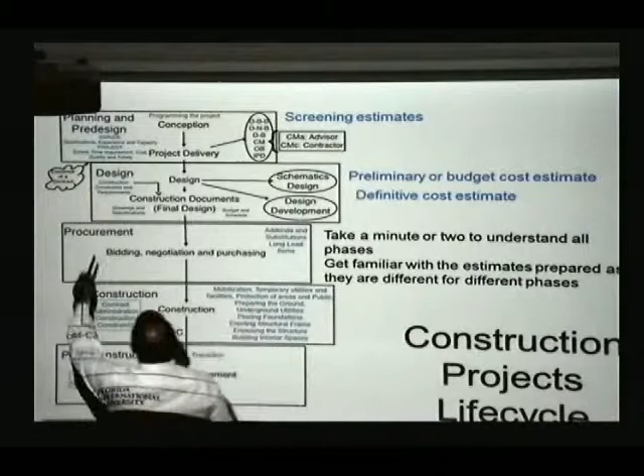All right, so this is the life cycle for a construction project. We start with the planning and pre-design of the building, or the concept that the owner wants to get done. It starts with the conceptual phase, right? What the owner wants to do. Is that a school? Is that a platform to launch rockets? Whatever it is. And then based on the experience of the owner, their capacity, the size of the project, they will decide what type of delivery system they prefer.

So then they will go with design build, or whatever contract they want to proceed with. And then they go into the design phase, saying, okay, let's design this a little bit, let's put the concept more into paper, and then it becomes a level where you have more documentation. At the beginning, you only have that conceptual idea, so it's difficult to put a number on a concept.

That's why at the beginning we create what's called a screening estimate. These are estimates based on price per square foot of other projects that have been done before, so you get an idea about how much you are going to spend without knowing exactly how much it's going to cost. As you move down to the design, you may start with preliminary design, you may have some schematics, so you create a more accurate estimate.

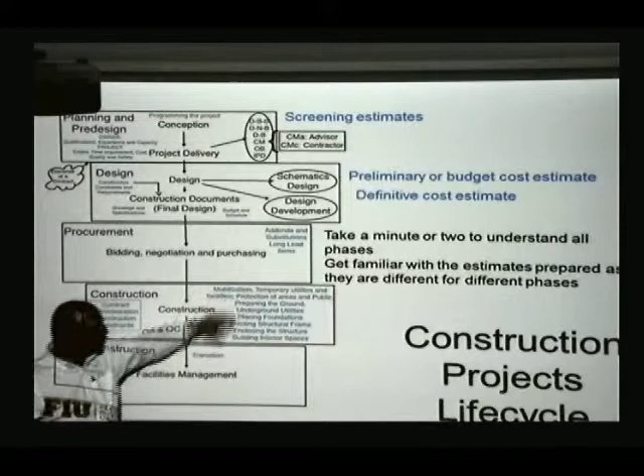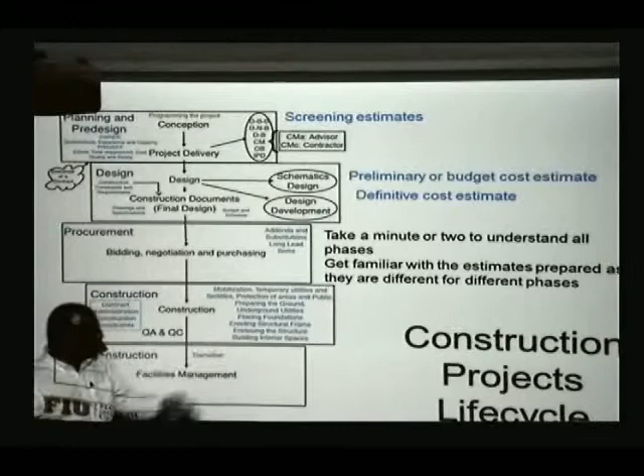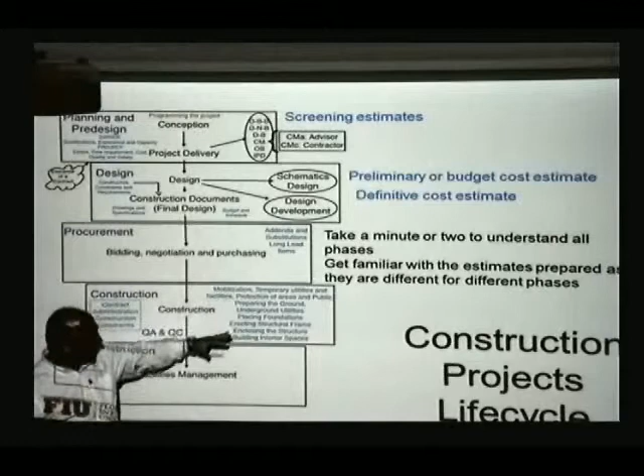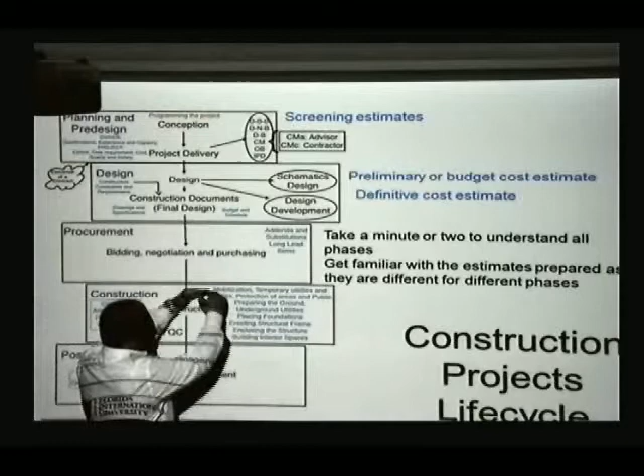Then you have to prepare the ground, look for underground utilities, place foundations, do the steel frame, close the structure, build interior spaces. That's the big items you need to go through to build something. And what we have to do is estimate the cost with each one of these items to figure out how much the total cost is going to be. So that's our first breakdown, right? We take a construction project and break it down into phases: mobilization, temporary utilities, the ground, underground utilities, foundation, the structure, enclosing the building, and then interior spaces. That's kind of in big pictures how we start breaking down that large project into pieces that are easier to

handle. Then we have the post-construction. The owner takes occupancy of the building, then the building now goes to facilities management. There is a transition and a closeout, then the owner takes over and moves forward. So that's for us the construction life cycle. Here on it will be operation, and then later will be decommissioning. We're not going to get into that portion of the life cycle for the project. So this is where we're interested to do our cost.

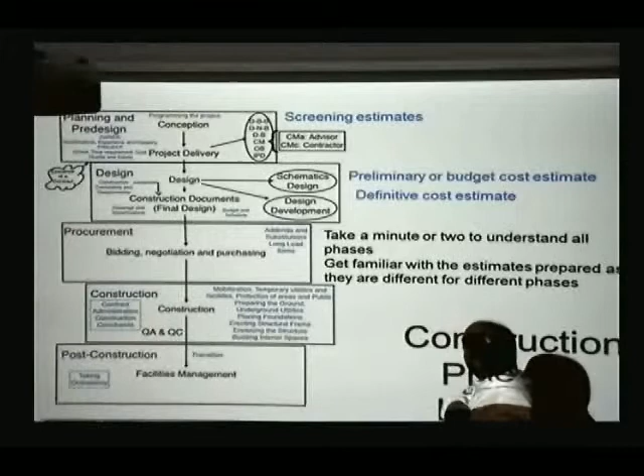The tricky part is that from the conception point, we're asked to prepare an estimate. How do you prepare an estimate when you don't have enough information? Just using the one that you did before. Use square feet cost, use what you did before, your best guess, and then move forward as you get more information to do a more accurate estimate.

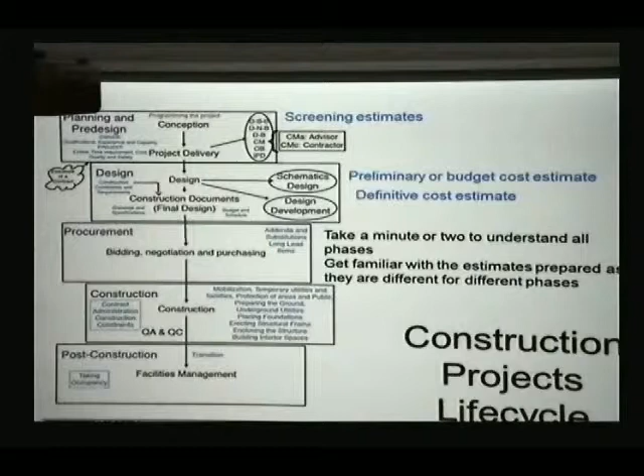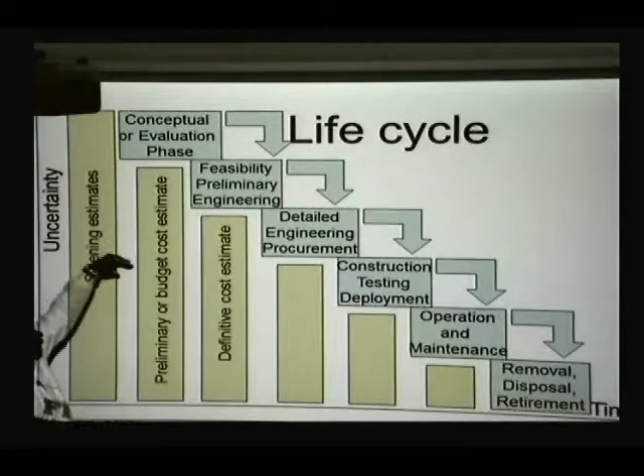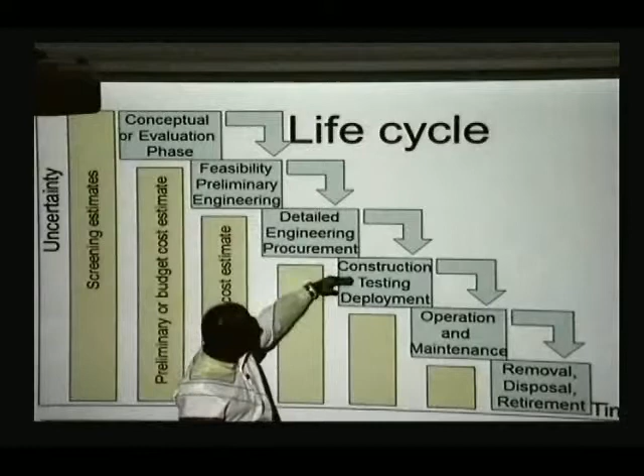So in the life cycle of the project, we start with very high uncertainty. We don't know exactly what the owner wants. And that's when we need to create the first estimate, the screening estimate. As we move down in time, the conceptual phase goes down into preliminary engineering, which goes down then into detailed engineering, which goes down then into construction. And as we move down into this life cycle to more detailed construction data, we reduce the uncertainty and we make better and more accurate estimates.

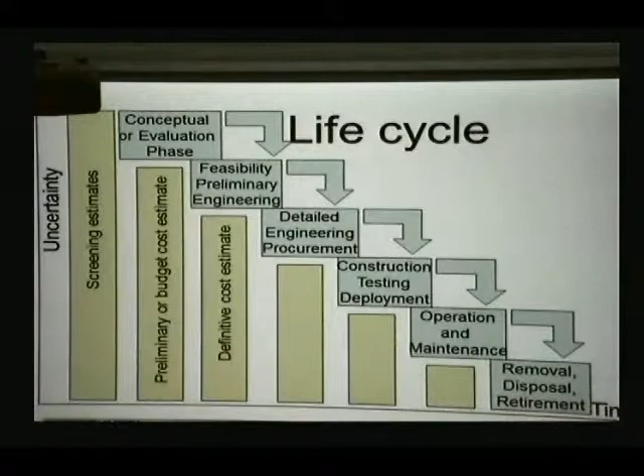So the process of estimating has also its own life cycle. We start with a request for quotation. RFQ is a request for quotation. The owner asks us, okay, we need a cost on this thing. We collect how much data we can from the owner. We put down the ground rules, which is basically all the assumptions that we're taking to prepare that estimate. Do we have enough labor available? Is that labor skilled labor? Do we have sources of materials? Do we have suppliers in the area? How far away is that from our office? We start collecting all this information to assemble the estimate.

So then we need a team of people, get the tools for the course project. The tools will be the software that we're going to use, familiarize with the scope of work, and then do the estimate.

Review to make sure that we have that correct, and reconcile that with the current trends and cost in the market. We can have one estimate done exactly the same as one five years ago, and the prices will be completely different because there are market factors that affect the cost. The quantities may be the exact same ones, but the cost of transforming those materials into the real project will be different.

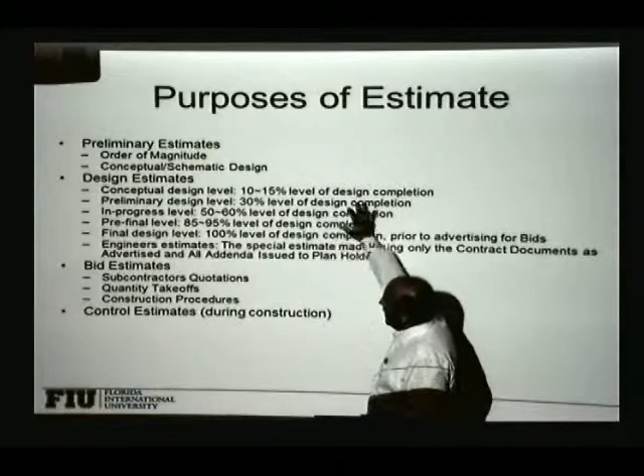When we do the estimate for the cost, we need to know at what level of design we are, how much information we have, because that's going to affect our accuracy.

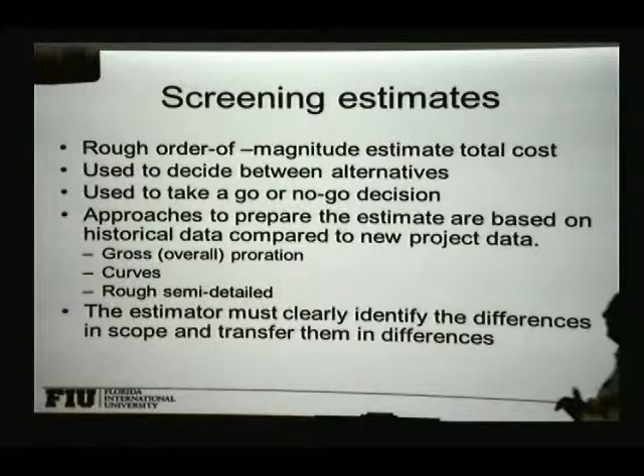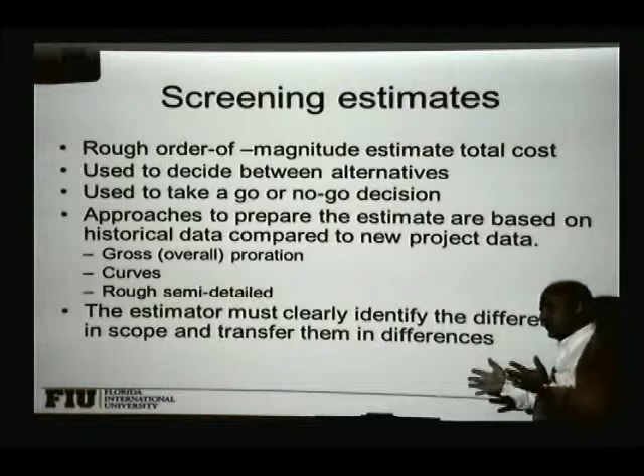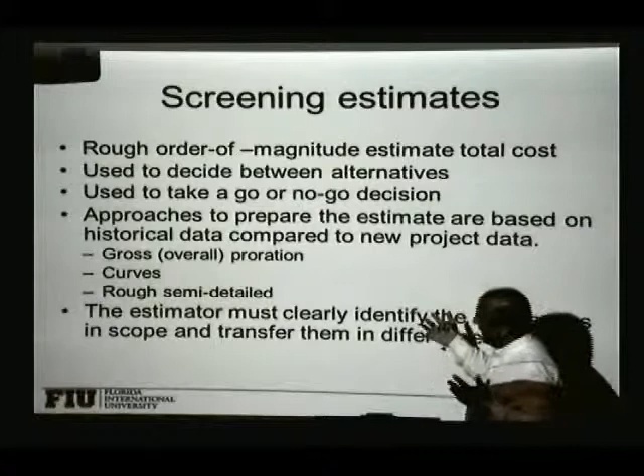We've talked about these screening estimates that we do at the beginning of the project, where we are in the go or no-go decision. So how do you prepare an estimate when you have very little to go with? You use information from previous projects that you have, so that's sort of a proration or an overall application of a previous project to a new one.

You can use some curves where you say, okay, the cost that we had before is different from the one we have now, so you apply some changes. You may identify the difference between what you have done before and what you're doing now and apply some cost for that.

The square foot estimate is very useful. Basically, you calculate the area or volume of certain areas, then apply a cost per square foot, and come up with a rough estimate for that area. These costs per square foot can come from books or from previous jobs, where you take your estimate and divide by the area of the project to get that cost per square foot.